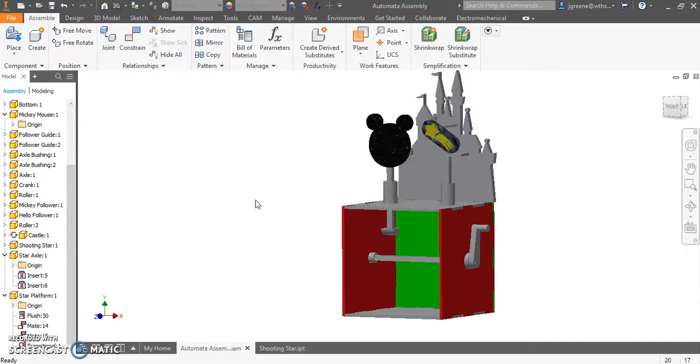Engineering students, here's another quick tutorial for the automata on constraining the back of your follower to a piece that you created for maybe gluing. Okay, so right now here's my automata. I've got the Mickey Mouse, I've got the Disney Castle, and then a little shooting star that I made. Two pieces which I'll cut out and glue together.

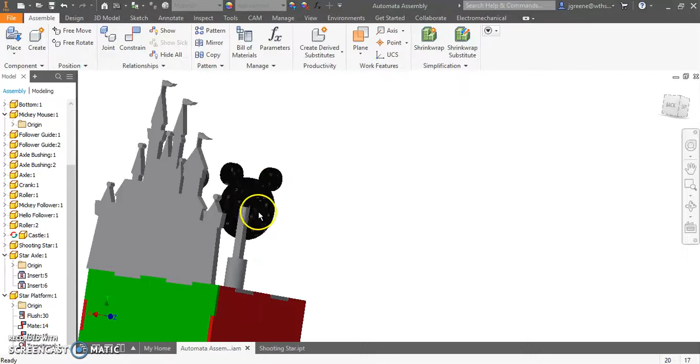So here's my Mickey head, and on the back it's going to sit somewhere in the center. At least that's where I want it. And I might need to adjust that up and down, but we're first going to figure out where that is. So I'm going to open up my Mickey head, go to the back of it, and create a new sketch on the back. And we'll start right in the center.

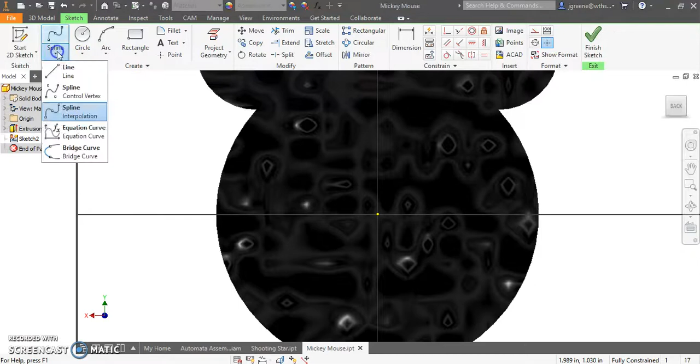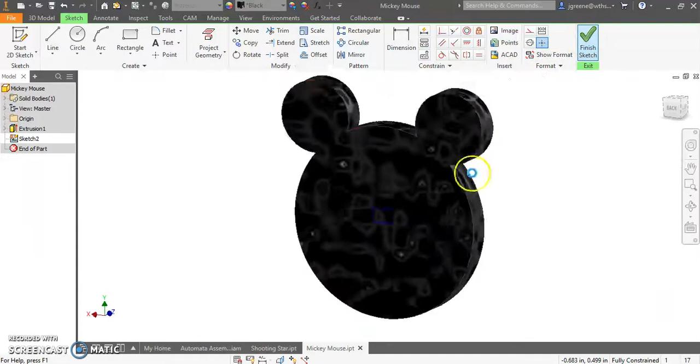That's nice and easy. So I'm going to grab a line and draw anywhere a 1/4 inch line, size of the axle. And I'm going to put the center point of that directly on the center point there. Next, I'm pretty much good with what that is. I'm going to finish the sketch. Then I'm going to grab the point tool in the work features and put a point right at the end, right there.

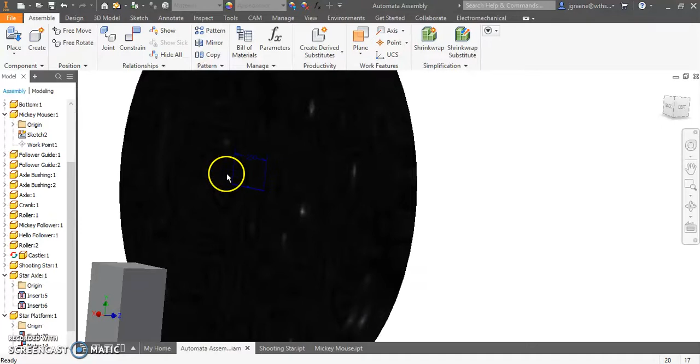Now that that's good, I'm going to save that, go back to my assembly, and my little line should be there, and my point should be there. It's not showing up. If it's not showing up, we can show another way around it. But I'm going to go constrain, and I'm going to select the top surface here, and select the line. So now you can see that they're on the same plane.

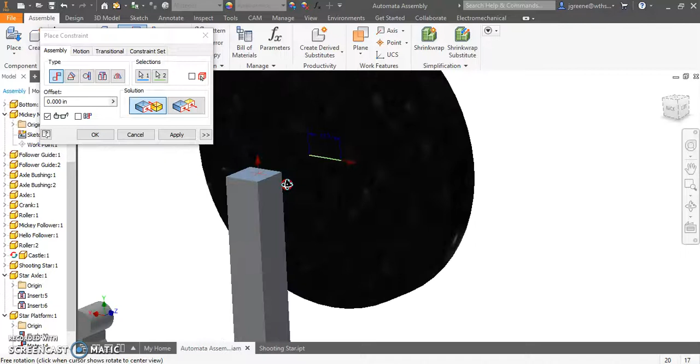I'm going to select the back of my Mickey, and right here, that's where I would glue it. Apply. And now as this goes up and down, you can see that the follower follows it, but it does move left and right, and we want to get rid of that movement. And so to get rid of that movement, this is where you want that point at the end.

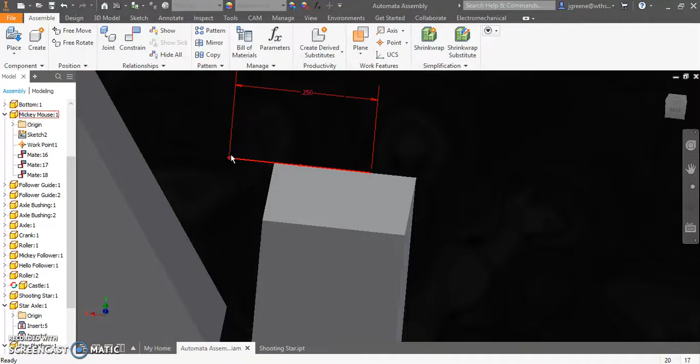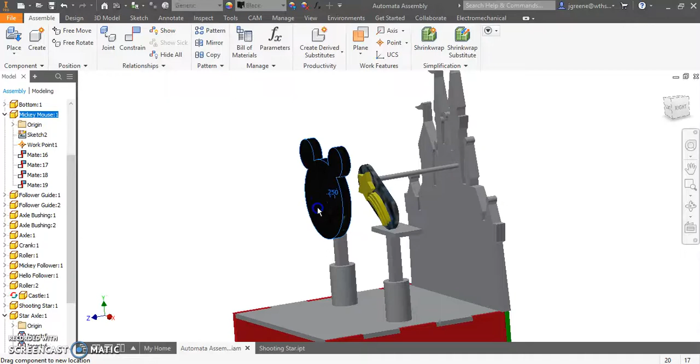If the point doesn't show up, we could always use the point tool inside the assembly and put it right there. And then we can constrain the point to this top edge, so they're in line. I can hit apply, cancel, and now my Mickey should not move around other than the direction of up and down with the follower. So again, that's one way. Now that moves up and down. I don't have cams in there yet because I haven't figured that out.

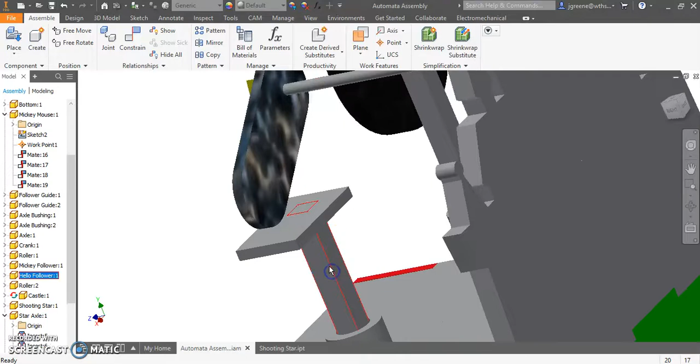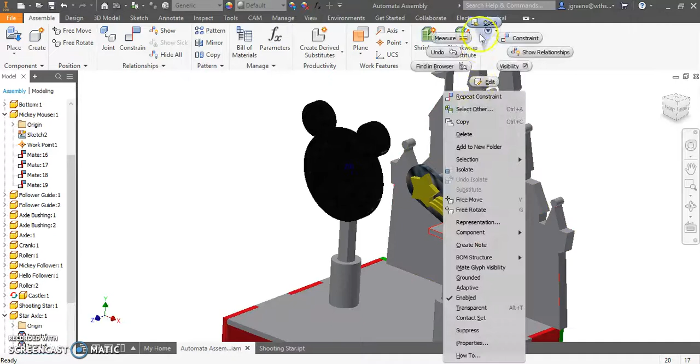And I also, for my shooting star, made an axle back here, and I attached that to a hole I made in the castle. And then for this follower, instead of just gluing it back there, I want this to be able to move up and down and transition a little shooting star like it's in the sky, just kind of waving around a bit. So for this, I created a platform, and the size of the platform is going to be dependent on what you want.

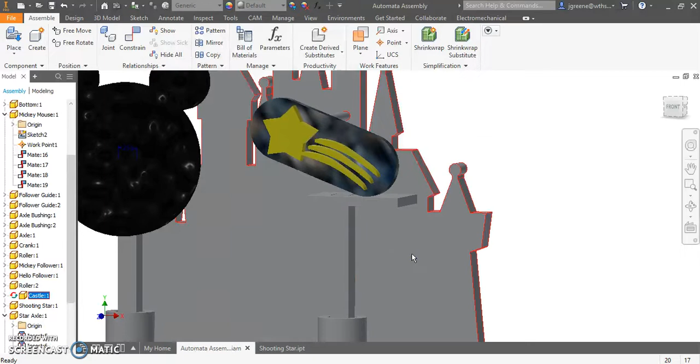I made a 1/4 inch square hole in there, so I can place the axle through that square hole. I can glue that, and then I made it a little bit larger to the right, and the reason for that is a little hard to see here. Let me turn this a different color. Any color, doesn't matter, just so I can see it.

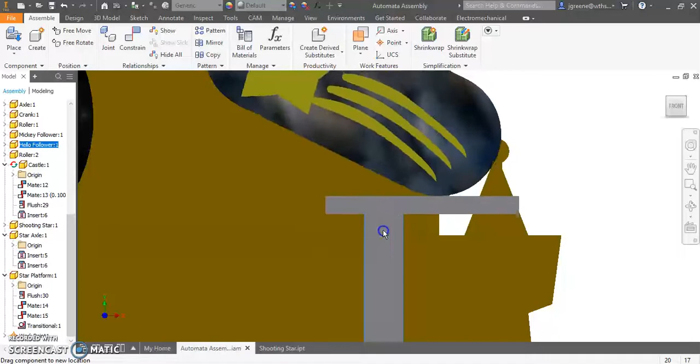As this moves up and down, you can see that my shooting star will transition on that, and the point of contact actually moves to the right a bit and then moves back to the left as it comes down. So I want to make sure that there's plenty of room there for it to go up and down. If it goes too far, it can fall off of there, which I don't want to happen. So that will also be part of designing my cams. So again, that's just a quick way to attach something to there.

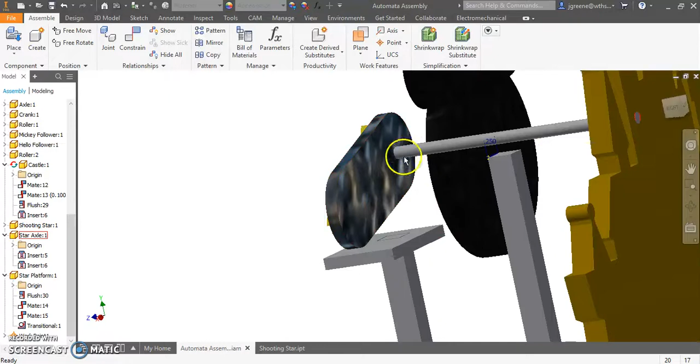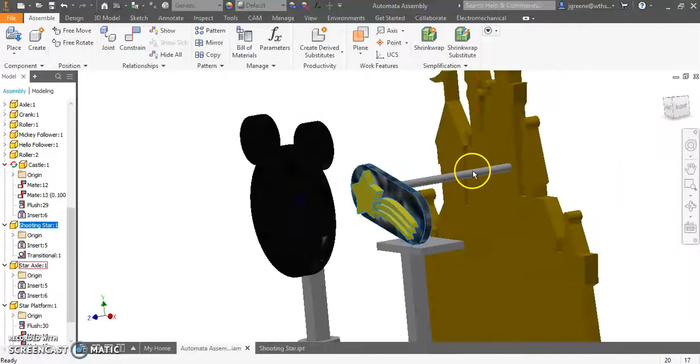I used the insert constraint for my axle here in the back of my castle. I created this little platform. I constrained it to the follower, and then I just used a transition constraint on the shooting star over here to the bottom of there. So two different ways. This is constrained in place by the axle, but it can still rotate up and down, and that follows that follower. So again, quick video on what you can do to constrain pieces together, like if you're just going to glue it or you're going to set it on some type of platform.